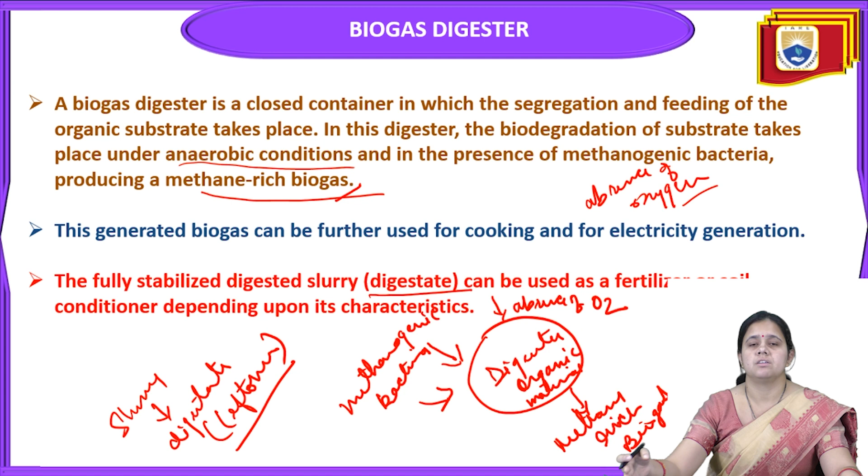Next, there are basically three main types of biogas digesters available on the basis of gas storage. The digester is the dome-shaped structure, and the shape will be different depending upon the type of digester. First is the fixed dome type digester, called the Chinese type. Then the floating drum type biogas digester, which is the Indian type. And next is the bag type, that is the Taiwanese type.

These digesters can be further divided into two ways based on the procedures. When we talk about the shape of the biogas digester, three types are there: first the fixed dome type, then the floating drum type, and then the bag type. The fixed dome type is also called the Chinese type, the floating type is mainly called the Indian type, and the bag type is the Taiwanese type.

And the process that takes place inside the digester can be a continuous mode or a batch mode. The continuous mode means the material is added continuously and the biogas production is uninterrupted. Continuously, the process is going on.

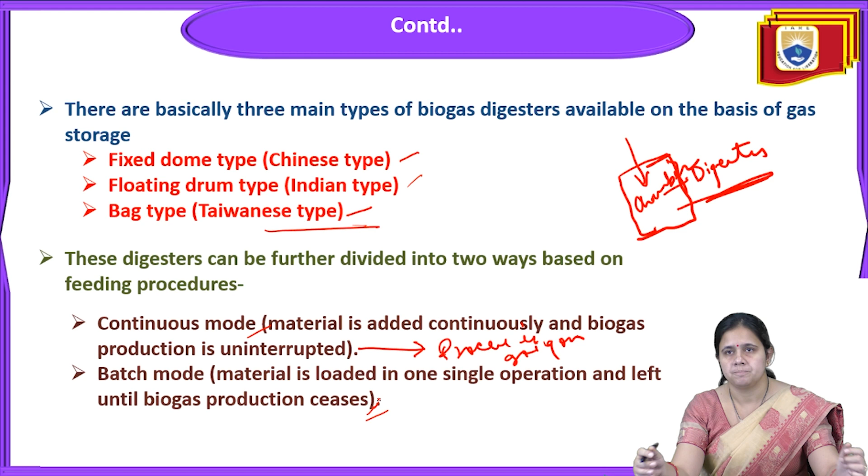Now we'll talk about the fixed dome type digester. A fixed dome type digester consists of an airtight container and a fermentation chamber constructed of brick, stone or concrete. So that chamber will be made of brick, stone or concrete.

So the fermentation chamber is there, with feed and digestate pipes, and a fixed dome on top for biogas storage. The chamber is there, and on top of the chamber there is one dome-shaped structure. That's why it is called a fixed dome.

Next, the reaction and biogas storage chambers are connected. Sealing is achieved by building up several layers of mortar on the digester's inner surface. So we seal these biogas digesters by building up many layers of mortar on the digester's inner surface.

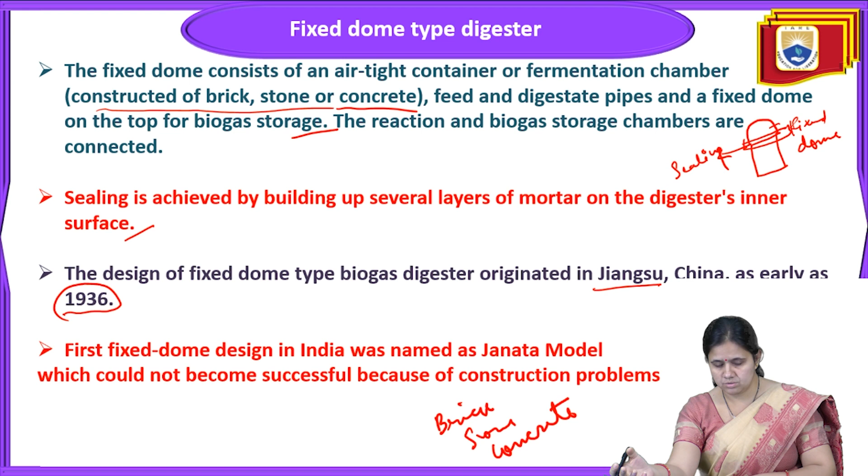Okay, so let's see this picture. Then another model came as its successor. That model is called the Deen Bandhu model, which improved the design and consumes less building material.

Typical feedstock for these digesters is animal manure, night soil like human excreta, and agricultural waste. In India, the fixed dome digester was not very successful, so the next model came into use. That model is called the Deen Bandhu model; it improved the design and consumes much less building material.

So typical feedstock for these digesters is animal manure, night soil and agricultural waste. These are most of the feedstocks that should be kept inside the fixed dome type digester to get the biogas.

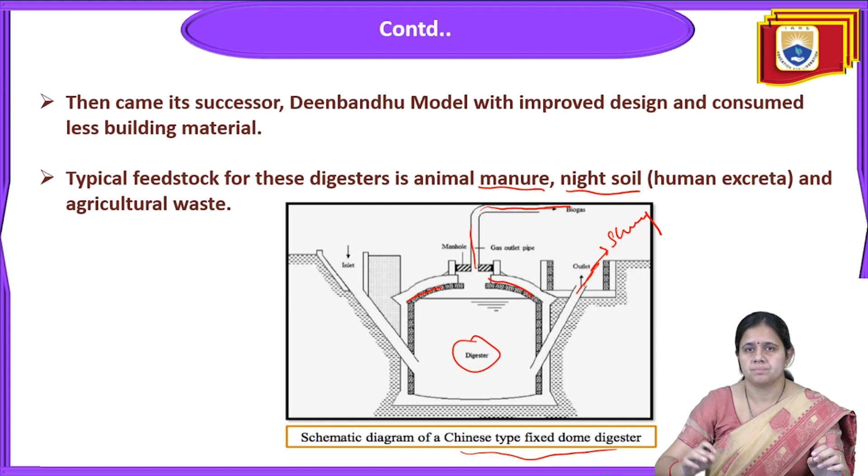Now we'll discuss the next type of digester, that is the floating drum type digester. The floating drum type digester was designed by Jashu Bhai J Patel from India in the year 1956. This floating drum biogas plant is called the Gobar gas plant, and it is commonly used in our country.

The floating drum plant consists of an underground digester, which is cylindrical or dome shaped, and a moving gas holder. The gas holder floats either directly on the fermentation slurry or in a water jacket of its own, and the gas is collected in the gas drum, which rises or moves down according to the amount of gas stored.

This is called the floating drum plant. It consists of an underground digester, and that digester is cylindrical or sometimes dome shaped, with a moving gas holder. That gas holder floats either directly on the fermentation slurry or in a water jacket of its own, and the gas is collected in the gas drum.

The gas drum is there below this structure, and the gas is collected in the gas drum, and it rises or moves down according to the amount of gas stored inside this floating drum type digester. It was first designed by Jashu Bhai J Patel very early, in the year 1956.

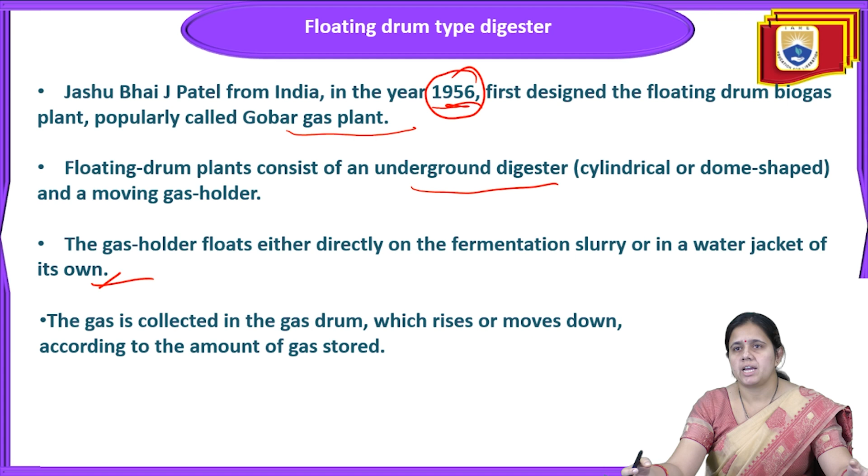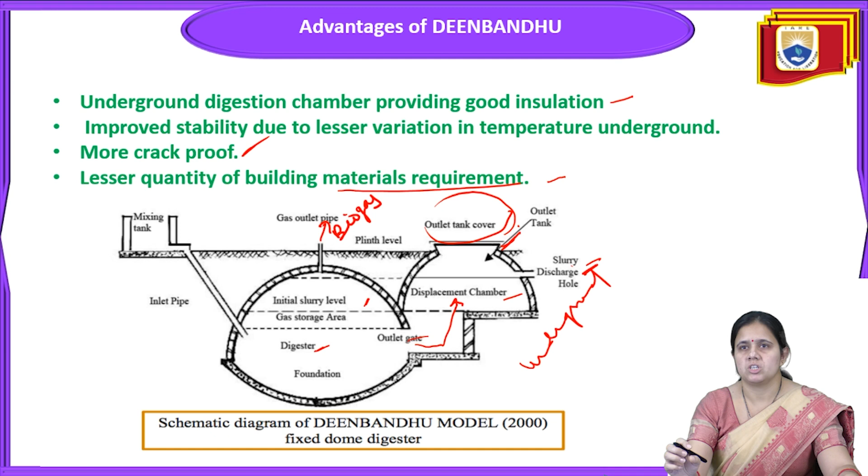The next type is the bag type or balloon type digester. The bag digester comprises a long cylinder of either PVC, that is polyvinyl chloride, or a material known as red mud plastic. It was developed in the year 1974 from the residue of bauxite smelted in aluminum production plants.

The bag is made of two materials: polyvinyl chloride and red mud plastic. Incorporated into the bag are inlet and outlet pipes for the feedstock and slurry, and a gas outlet pipe.

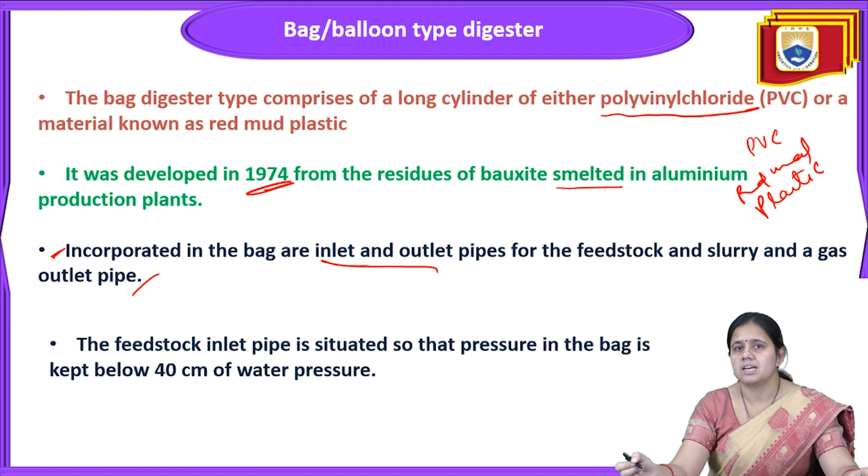Next point is that a complete 50 meter cube volume digester will weigh just 270 kg and can be easily installed in a shallow trench. So the complete digester will weigh around 270 kg and it could be easily installed in some shallow trench.

Next, the feedstock is fed into the bag semi-continuously, with the feed displacing an equal amount of slurry removed from the outlet. Feedstock means the organic contents will be fed into the bag and kept inside the bag. Semi-continuously means continuously with some other feed that is going to displace an equal amount of slurry, which can be removed from the outlet chamber of this biogas digester.

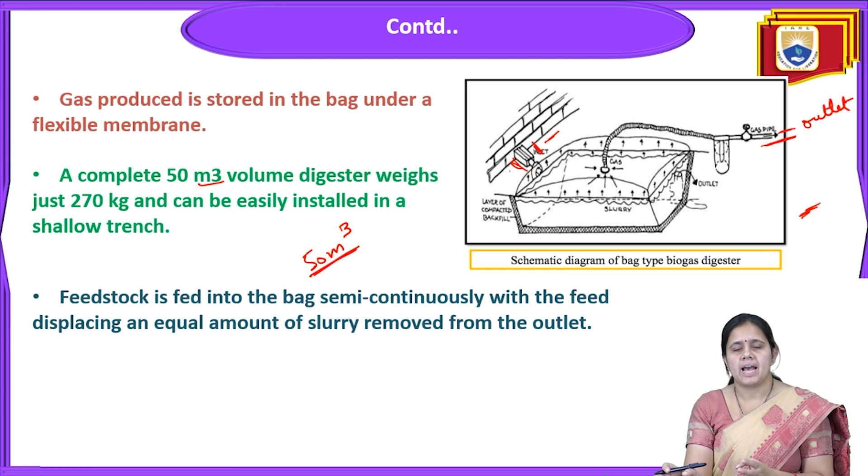So in the bag type biogas digester, the feedstock is fed semi-continuously, with the feed displacing an equal amount of slurry removed from the outlet. That's why some pressure and this displacement should be maintained inside these bag type biogas plants.

Next point is that if red mud plastic or PVC is unobtainable, meaning not available, then the design can also be constructed from concrete with a flexible gas collecting membrane situated at the top of the container. You can see this is the picture of the bag type biogas digester. So if PVC and red mud are not available, concrete material can be used with a flexible gas collecting membrane situated on the top of the container.

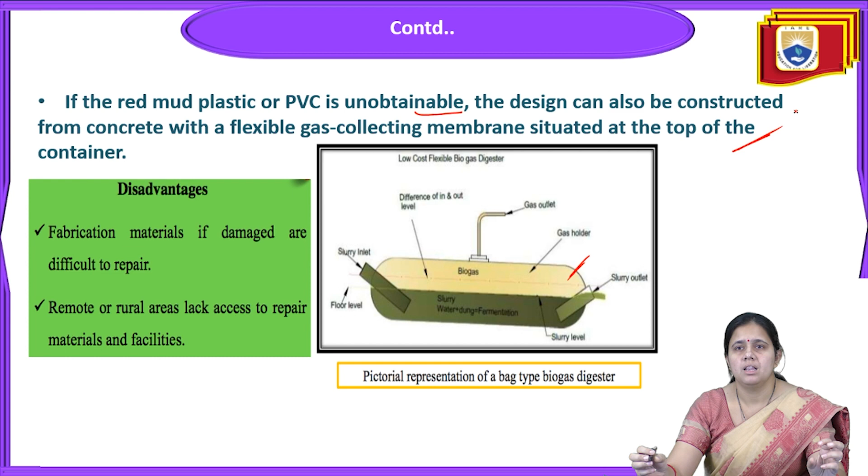Its disadvantage is only that the fabrication material, if damaged, is very difficult to repair, and remote or rural areas lack access to repair material and facilities. So if we make this type of biogas digester in a rural area, it will be very tough to repair or work on because of the repair material and facilities. And if this PVC or red mud plastic is not available, this design can be constructed from concrete with a flexible gas collecting membrane at the top of the container.

Next is the types of digesters, meaning the process inside the chamber. We are going to discuss the process. First is the single stage digester and the multiple stage digester. In single stage digesters, all the stages of the anaerobic digestion process occur inside a single tank and compete among themselves.

Next is the multiple stage digester. Multiple stage will allow the stages of anaerobic digestion to happen in separate tanks. For example, in a two-stage digester, the first two steps can occur in one tank and then the substrate is transferred to a second tank where methanogenesis occurs. So two tanks will be there.

So in this way, on the basis of the steps of anaerobic digestion, two types are there: first the single stage, next the multiple stage digesters. A two stage digester involves two digesters. In the first one some steps happen, then it enters the second one where the methanogenesis process occurs. After the methanogenesis process, biogas can be taken from these digester tanks.

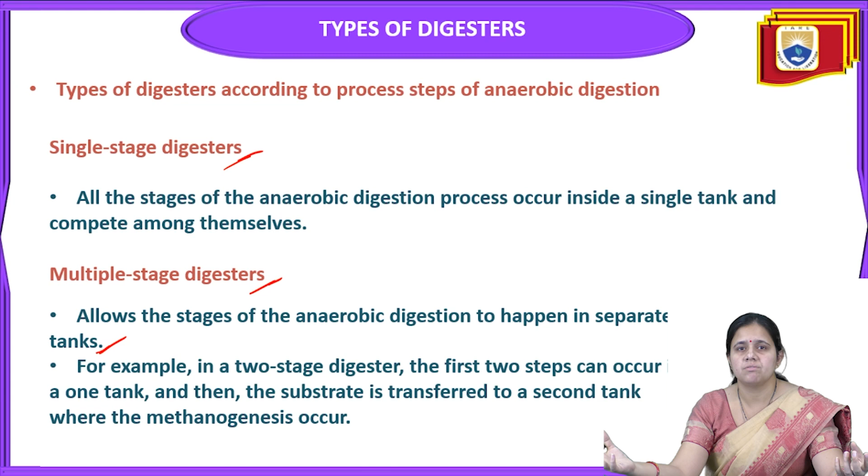So the separation of the digester into hydrolyzers and methanizers changes the process dynamics of the digester by allowing the individual bacterial species to separately perform hydrolysis and methanogenesis. Basically two steps are there: hydrolysis and methanogenesis. So this changes the process dynamics of the digester by allowing the individual bacterial species separately to perform the hydrolysis and methanogenesis.

Two-stage reactors will maintain pH for the proper functioning of both hydrolytic acidogenic and methanogenic bacteria at their respective functional pH range. So you can see that this is the biogas. Hydrolysis process will be there inside the tank, so the acidogenic stage is there. Next, this is the methanogenic stage.

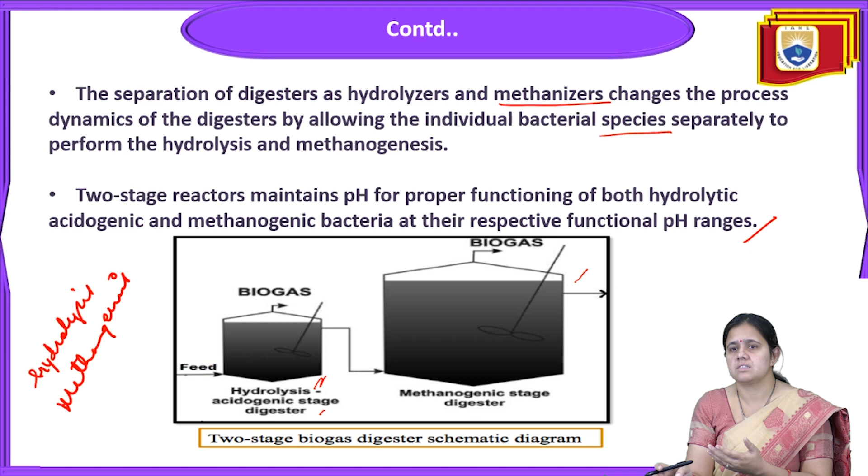So up to the hydrolysis stage, it will happen somewhere else. Then after, it will enter into the methanogenic stage where the next stage will be carried out. So, two-stage biogas digester. This is the picture representation of this two-stage biogas digester. And next is the design consideration of a biogas digester.

So first of all, we'll discuss the raw material availability. The gas production should be proportional to the amount of raw material digested. Next, we'll discuss the type of materials. The CN ratio of the raw materials should be in the optimum range for better digestion. If the raw material is easily digestible, the size of the digester can be reduced proportionally.

Next is the size of raw material. The feed materials should be cut into pieces so that the surface area of the reaction is the maximum, and it will also ensure the homogeneous flow of the waste slurry. So first is the raw material availability, next is the type of materials, and then size of the raw materials. All are basic things that should be considered before designing biogas digesters. In case of type of materials, the CN ratio should be in the optimum range, and if the raw material is easily digestible, the size of digester can be reduced proportionally.

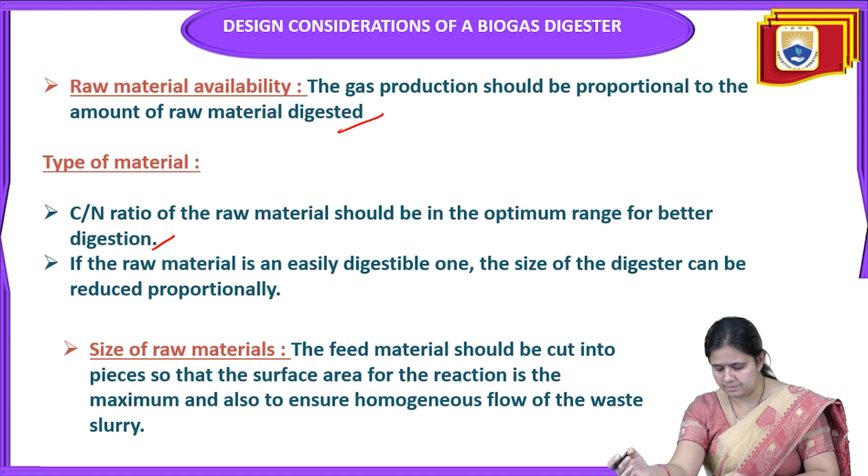Next is the heating requirement and mixing requirement. For heating, if the digester is situated in a cold area, then sufficient heating arrangement should be provided to keep the digestion temperature within the optimum range, and burying the digesters under the ground helps to minimize the temperature fluctuation of the ambient around the digesters.

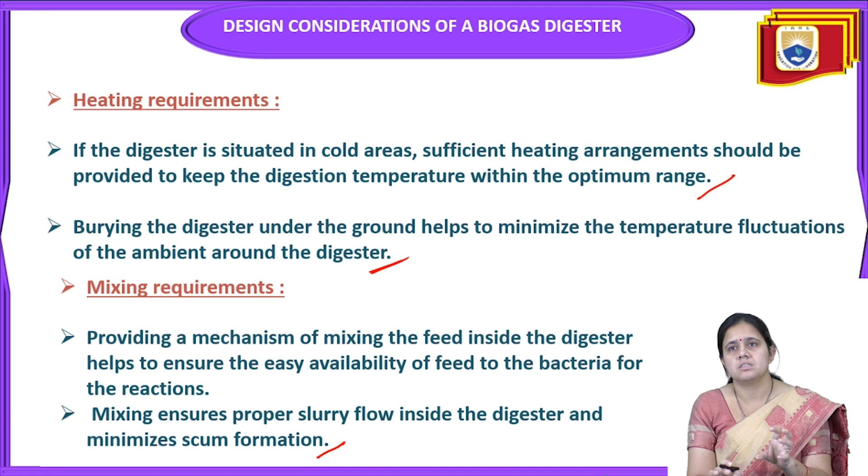Next is the mixing requirement. It means providing a mechanism for mixing the feed inside the digesters, which helps ensure easy availability of feed to the bacteria for the further reaction. Mixing will ensure proper slurry flow inside the digesters and minimize scum formation. So heating and mixing requirements are very basic things that should be considered before designing biogas digesters.

Construction material availability. Use of locally available expertise and material closest to the site for the construction of a digester reduces the cost. Fabrication from corrosion-resistant materials such as wood, ferrocement, concrete, brick or stone rather than metal may also reduce cost by extending the equipment life. Larger digesters require proper maintenance also. Removal of inert waste such as sand and rocks prevents wear on mechanical parts and extends the equipment life.

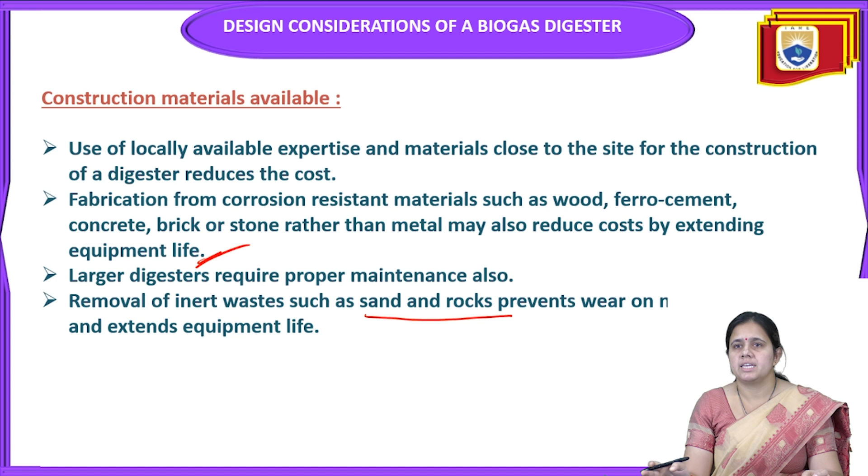So that is the availability of the construction material. Use of locally available expertise and material close to the site for the construction of digesters reduces the cost. Fabrication from corrosion-resistant materials such as wood, ferrocement, concrete, bricks or stone rather than metals may also reduce the cost by extending the equipment life.